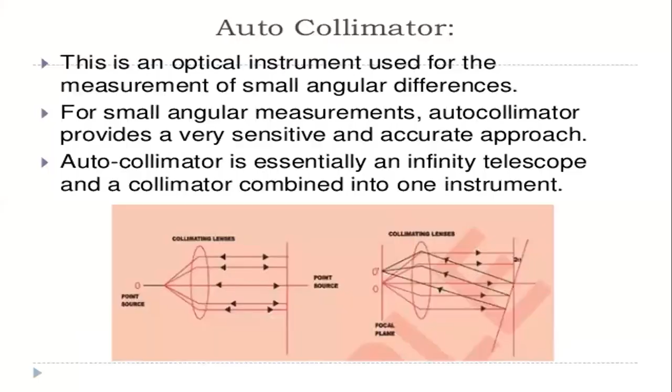This is my 59th lecture on the subject metrology. In earlier classes, we discussed the alignment tests in lathe machines, drilling machines, and milling machines. Today, I will explain the equipment required for the different alignment tests or geometrical tests. These alignment tests and geometrical tests are the same, conducted in two ways, but the procedure and methodology is the same in both types.

Generally, the measuring equipments used for the alignment tests are: first, dial gauges; second, test mandrels; third, straight edges; fourth, spirit level; fifth, autocollimator; and next, waviness meter. So these are all the different measurements and different equipment used in the alignment tests or the geometrical tests.

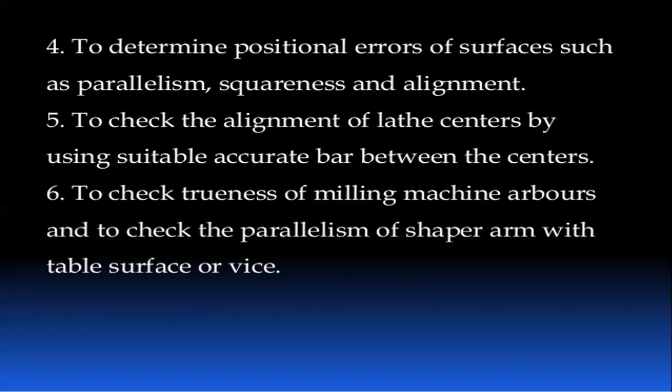Then the advantages of the dial indicator. This instrument can be widely and easily used, and can be easily used and read even by an unskilled worker.

Next, it has low contact pressure, which is low and uniform.

Next, the instrument is accurate and economical. Whenever we are going to use different types of equipment, we need to check what are the different economical equipment to be used, and this one is of that type.

The last advantage is that it is easy to handle and can be set up very quickly. So these are the different advantages of the dial indicator.

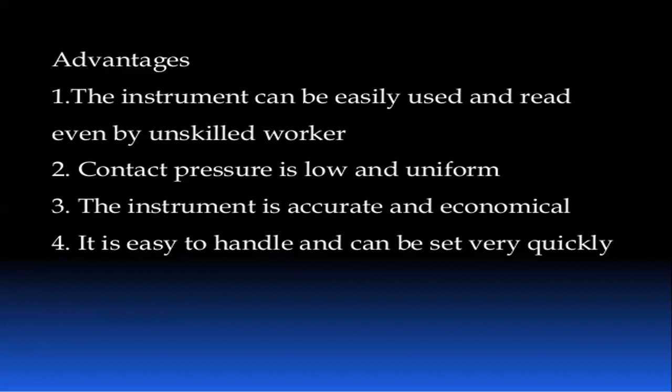So next is test mandrels. These test mandrels are used for checking the true running of the spindles, the headstock as well as the tailstock.

Two types of test mandrels are regularly used for geometrical tests. The first one is mandrels with a cylindrical measuring surface and taper shank, which can be inserted into the taper bore of the main spindle.

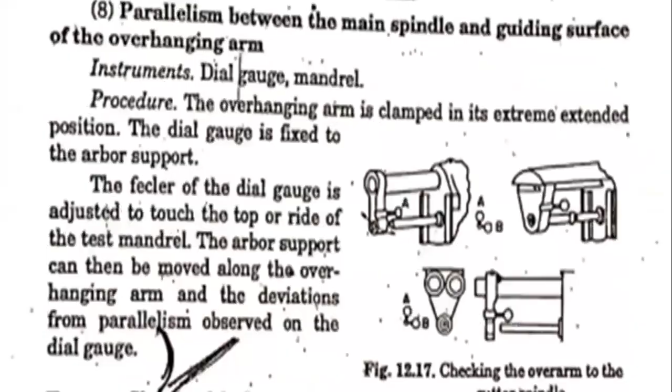The steel square is a precision tool used for laying out lines or for testing, highly used for testing the squareness of two surfaces with each other. So that is about squares.

Let us see the straight edges. Generally, these straight edges are used to check surfaces for flatness and act as a guide for scribing long straight lines in layout work.

Next, rectangular bars of hardened and accurately ground steel are regularly used as straight edges.

Next, the edges are flat and parallel. So in the straight edges, the edges need to be flat and parallel also. That is one condition. Generally these straight edges need to be parallel, because we are going to measure the parallel ones.

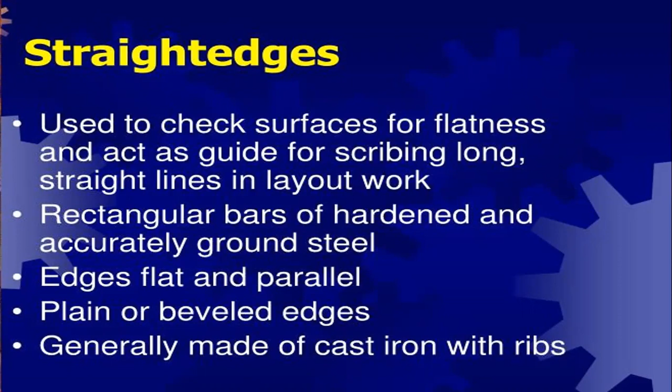So these are of the straight edges. Now let's go to the next tool to be used.

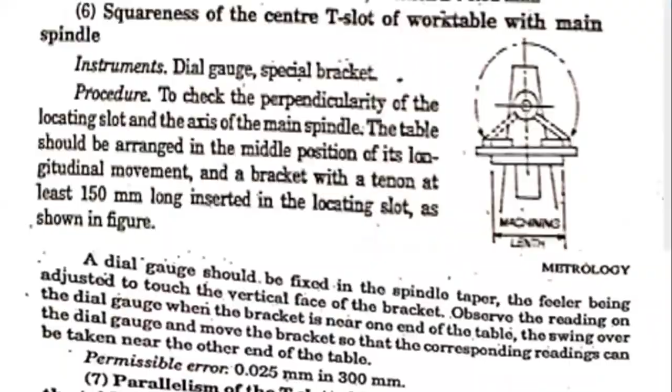Generally these straight edges error at the top of the standard square should be less than plus or minus 0.01 mm. So that should be less than 0.01 mm, which is of a precision less than plus or minus 0.005.

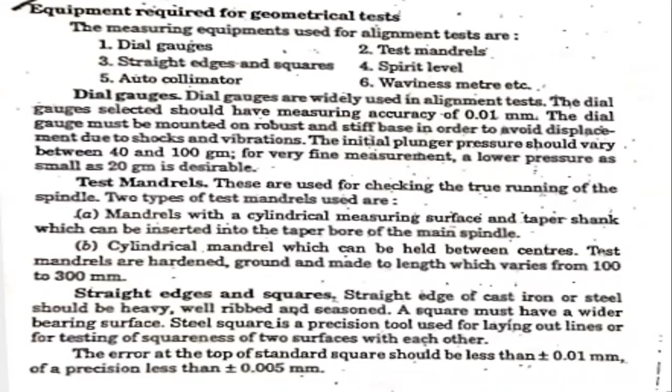So that is the different section of the straight edges. And whenever a straight edge is placed on the machine surfaces, it is to check them for flatness or straightness. So generally these straight edges are used to check the flatness or straightness of an object.

Next one we are going to take the waviness meter. So this waviness meter has magnification levels. Generally these take the magnifications at each and every level. The magnification level should be 50 is to 1, which is useful for recording and examining the surface waviness. So these are highly used for examining the surface or recording the surface waviness. These are used in both conditions.